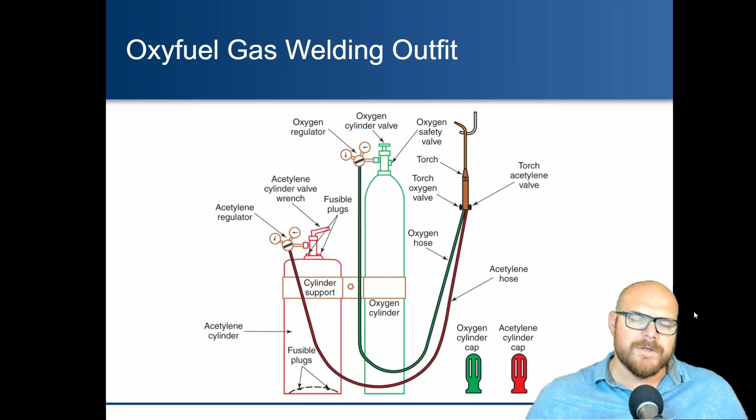Cutting attachments and cutting are going to be basically the same systems. We're going to talk about that a little bit later, but we just put a cutting attachment on. There's a lot of similarities with that, and cutting is still very widely used, whether it's using oxy-fuel or plasma, which we're also going to get into a little bit later on.

The oxygen valves, we've kind of talked about this in class, but one of the important things with these is that the valves are going to be either in the fully closed position or the fully open position. They're designed to withstand high pressures, up to about 2,400 psi, somewhere in that range, so it's a lot of pressure.

The tanks are made from steel, typically a quarter-inch steel, so they're pretty strong and durable and can handle that. But the valves, when they seal, they either seal at the base or seal at the top, which is why it's very important to open the oxygen valves all the way so we don't lose oxygen if we only just crack it. Because of the high pressure, it can actually leak by. So they seal at the top, they seal at the bottom.

On the oxygen tanks, we also typically have some sort of pressure device or safety system. If the pressure increases within that tank, this little valve will open up and let some of the gas out. Sometimes if things are being stored outside, if tanks are in the sun and exposed, it heats up the gases and the pressure is going to increase. Much like your tires increase as you start driving, the pressures will typically increase as it heats up. The same thing's going to happen in these tanks.

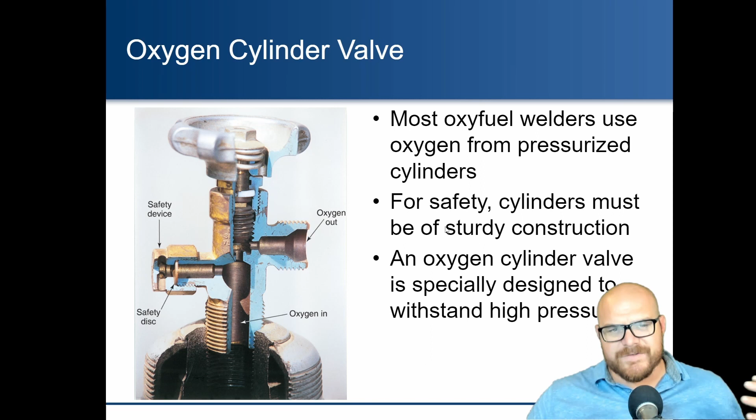So if they happen to go over the regulator pressure right here, it's going to just pop that valve open. Sometimes you may hear them opening. It's just releasing any excess pressure to make sure that the tank doesn't explode. Otherwise, they're pretty strong, pretty durable, and they're going to hold a lot.

In our systems, when we're doing oxy-fuel, we actually have a manifold system. So we have tanks that are at the end, and then it feeds lines into there. We call that a manifold system.

You are going to have a mainline regulator. This is true of both the oxygen and the acetylene. Then each station is going to have its own regulator for each one of those things. The master regulator controls that pressure, and we typically increase it a little bit more so we can feed the 12 different units that we have.

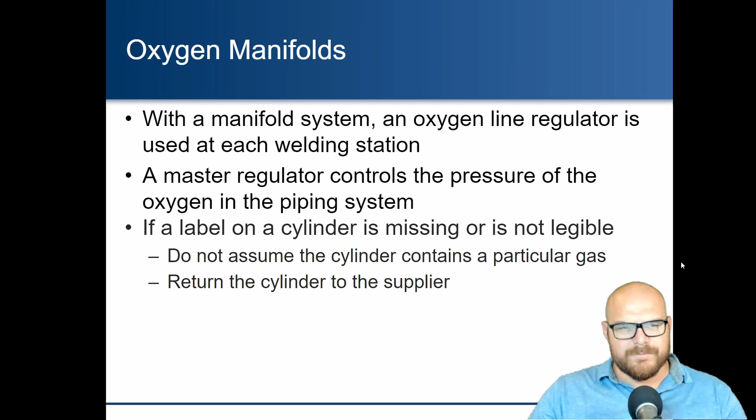Each of the tanks should be labeled with what is actually contained inside. If it's oxygen, it should be labeled oxygen. If it's acetylene, it should be labeled acetylene. If you ever have a tank without a label, do not use it. Don't assume what gas is inside, because you could be mixing and matching different things and it could cause a lot of issues. So the tank should be labeled. If they're not, return them to the supplier so you can get them replaced.

Acetylene is a gas that is very, very highly flammable. It will actually explode under 30 psi, or 30 pounds per square inch, which is not very much. So we have to be very cautious when we're working with these things.

Acetylene actually has acetone inside the tank to help balance it out. These tanks are typically around 250 psi when fully filled, and that acetone on the inside helps encapsulate the acetylene to make sure it doesn't actually hit that 30 psi. So it's one way that allows us to maintain that pressure.

One thing we have to be concerned with is how much we are drawing from that acetylene tank. We don't want to completely empty that tank very quickly, because the tank pressure and the acetone inside can get unbalanced and the tank could potentially explode.

They say that 1/7 of the cylinder's capacity should not be exceeded per hour. We don't have to worry about this in class because we'll put a new tank on there and may not replace it for the rest of the semester. We're not using that much acetylene, we're not drawing those things off, so we are very far away from this limit. But if you were in a high capacity, high use area, those are things you'd want to be concerned with.

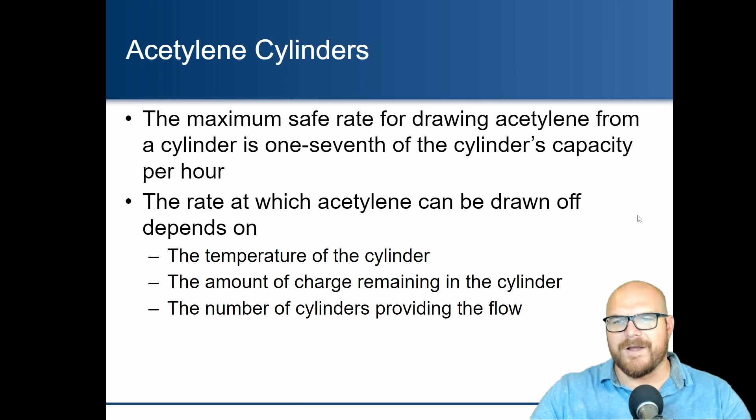Some of that depends on the temperature of the cylinder, how much is remaining in the cylinder, and how many different cylinders are providing the flow. We just use one for our systems, but some systems link a bunch together, which can help lower how much we're drawing off from each individual tank. If the tank is very low, it's obviously going to be more than 1/7, but it's the total capacity of the cylinder that matters, not what's actually left in the tank.

Fuel gases, whether we're using acetylene, which is the most common one, need to have a special system in place to make sure those things don't have a fire or anything coming back into them.

A lot of times, especially in a manifold system, the acetylene will go into a little water tank. We call that a water seal flashback arrestor. The gas goes down from the tank, and there's a pipe above the water level that enters into the manifold system. What this does is if there's a fire that gets into that piping system, it goes down into the water seal, the flame stays on top, and it will not allow it to go down into the water and back up into the tank. So there are systems in place to do that.

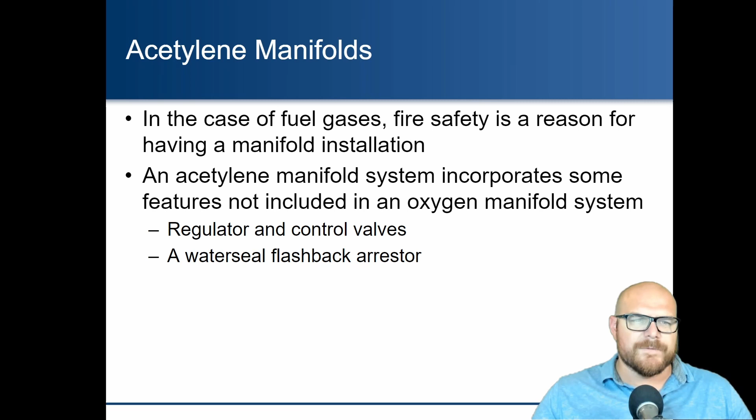We have regulators, control valves, we have flashback arrestors, they're all over the place. I'll show you some examples of what those things look like later on.

One thing that's really important is that acetylene should never go above 15 psi. There are red lines on the regulators indicating that you should never place it above there. In both our systems, whether cutting or welding, the pressure we're going to set those things at is 5 psi on the acetylene.

In our manifold system, we typically will set it to about 12 or 13, which is still under that 15 psi, but that's to allow the 12 different stations to be fed with the 5 psi that you need to run each of those things. If we just ran the main regulator at 5 psi, if everybody was running each one of those stations, you would not have that 5 psi at each of the stations. So we have to increase it a little bit.

It is pretty explosive. Acetylene can explode, like I said, under 30 psi. So we cut that in half and we set it to a maximum of 15. But when we're actually welding and cutting, we set it to 5 psi.

We have smelt that stuff in class. If you haven't smelt that, I will make sure that you do smell that stuff. Acetylene has a very distinct smell. They do that so that way if you smell that, you know exactly what that is, and we need to look at that and find out what's leaking or what was left on, and get that shut off or get it fixed if we need to.

If you have too much acetylene, breathing in a little bit of it is not a problem, but if you have a lot of acetylene, it can actually displace air in a poorly ventilated area. So if you're inside of a tank or inside of a closed area, you want to be very careful about that acetylene because it's lighter than air and it can displace that and then cause you to suffocate.

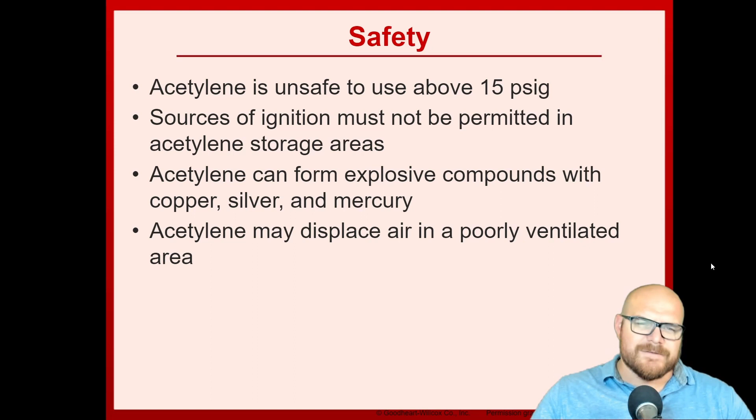We're not going to be welding in anything that is not well ventilated. We're not welding inside of anything or cutting or doing any of that stuff. So the chance or likelihood of that happening to us is very slim. But if you're ever in an area that is confined, you need to be careful about that.

To adjust that pressure and to increase it to the desired amount, you have the adjusting screw that's going to be in the center. You turn it clockwise. I guess I go clockwise like this - I'm backwards. You go clockwise to actually increase the pressure, and then counterclockwise to back it off.

When we are done welding, you turn it counterclockwise a couple turns to back that off and get that gauge back down to 0. We don't want to leave any oxygen or acetylene in these lines when we are done welding. Those things can cause issues - oxygen can cause a flame to get bigger, and acetylene is a flammable object. We want to completely remove that and store those only in the tanks when we are done.

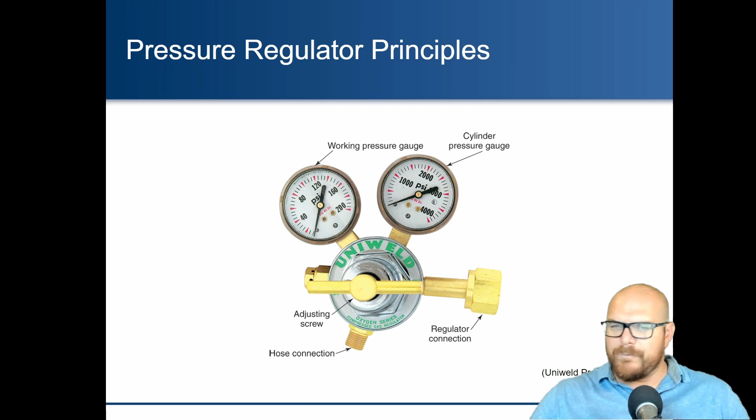Some things we talked about in class, but we're going to reference it again. The different hoses are going to be colored. Oxygen hoses are going to be colored green. They might also often be marked with OXY, indicating that they are going to be used for oxygen. They are going to be traditional right-handed threads. To help make sure that we don't mix these things up and we don't mix regulators up, on acetylene regulators or fuel regulators, we're going to be using left-handed threads. So they're actually going to go opposite.

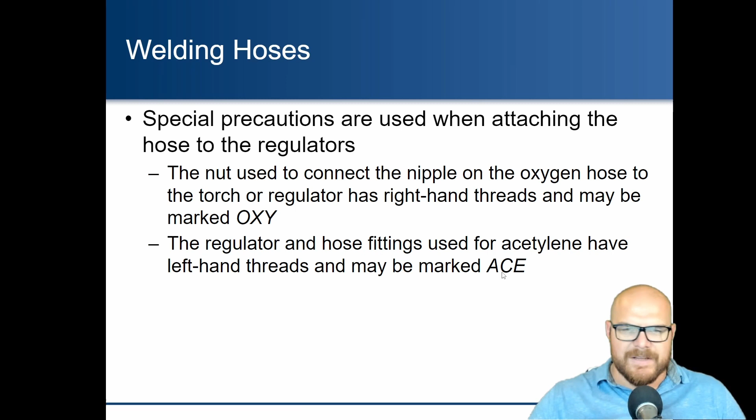This eliminates the possibility of us connecting an acetylene hose onto an oxygen regulator, or vice versa. Typically these fittings are marked with ACE, and they'll also sometimes have notches in the threads or fittings to indicate left-handed threads, so we know not to mix those things up.

The hoses we have to be careful with, especially the ones coming off each individual torch. If they come in contact with a flame or hot metal, they can melt and expose that gas into the environment. We want to make sure they're not kinked, as that can reduce flow. It can also weaken the hoses and cause them to break down prematurely.

During welding, hoses should be protected from falling objects, vehicles, and foot traffic. We don't want to step on them or roll over them. We don't want to do that kind of stuff. We've got to be careful.

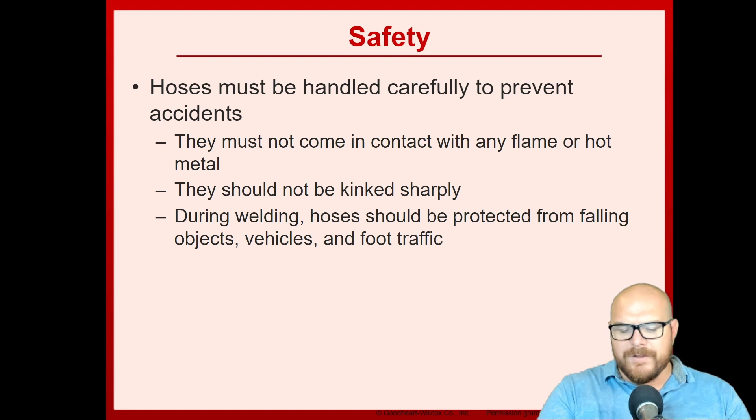At the welding stations, there are tubes that the hoses run down on top of the table, which helps protect them, and then they run underneath the table. The table also provides some protection, so the hoses are in pretty good condition and not exposed to a lot of those hazards. When we're cutting with the oxygen tanks, those things are a little more exposed, so we have to be careful when using them.

The torch bodies we're going to use are typically positive pressure torches. There are a couple different parts: you have the torch tip, this is the welding tip, and a little nut that you hand thread onto the top. This is where the mixing chamber happens, where the oxygen and acetylene mix. Inside the body is where the lines run through, and we have two different valves on this system to turn on our gases.

Our acetylene is always going to be on our left-hand side, and the oxygen is always going to be on the right. You can look at the color of the hoses to help indicate which valve is which gas on those systems.

In a positive pressure torch, the oxygen and fuel are mixed in the torch and burned at the torch tip, that's where we see the flames come out. The hand valves are used to adjust our gases up or down, giving us a little more acetylene or more oxygen.

What we're looking for is trying to reach that neutral flame. We don't want an oxidizing flame, which has too much oxygen. We don't want a carburizing flame, which has too much acetylene. If you haven't seen it in class, I'll show you how we actually set that flame. That is one of the most important parts of oxy-fuel welding.

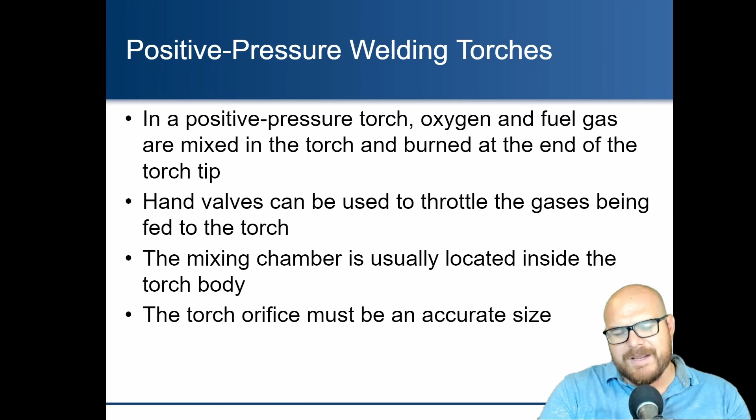The torch orifice must be of an accurate size. We have different sizes that we use in this class: a double aught, which is 2 zeros, an aught, which is 1-0, and a number 1 torch. As the numbers increase, the sizes of those torches get larger. So for thicker material, or to get a hotter weld, you up the size of that nozzle.

The welding tips we use on these things will vary. We do sometimes have to clean them out, as some are a little worn out and not new tips. So we have to make sure we're matching those things, and we might have to clean them out. If we get a flame that's split in two directions, we may have to do that.

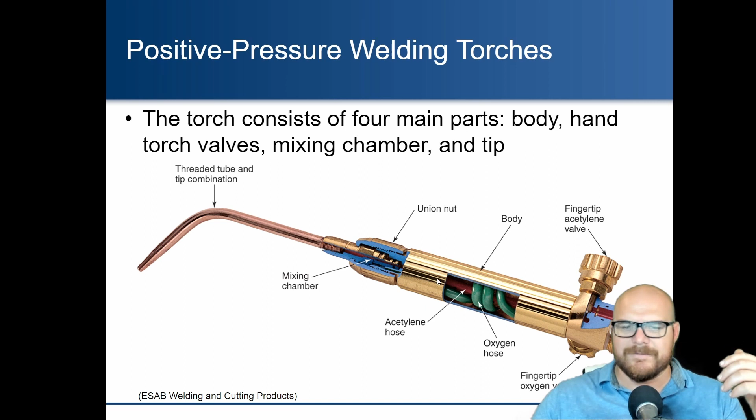There are lots of different torch tips. If you're having issues with them, you can swap them out with another one, or try to clean the tips out of any debris. Some tips are a two-piece system where you have your torch body and can change the tip there. The ones we have are just one assembly, so you unscrew this from the torch body, and then hand screw or hand tighten a different torch on. So if we want to swap the tips out, we simply pull this whole assembly off and swap it with that.

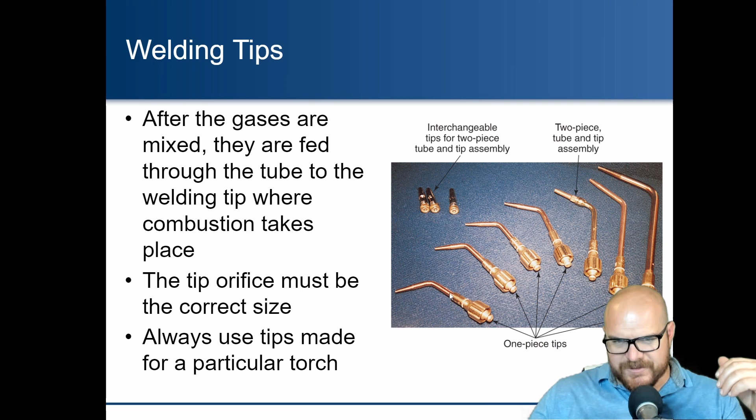The labels should be numbers just on the back side of that copper, which will indicate the tip size that we're going to be using.

Tip cleaners are used to help make sure that we clean it out. If we get debris, stuff can pop back up into that torch and cause it to clog up, which can cause the flame to become split. It's not going to weld good for you, you're going to have issues with it. A good torch tip helps make sure you actually are welding and get a good weld out of that.

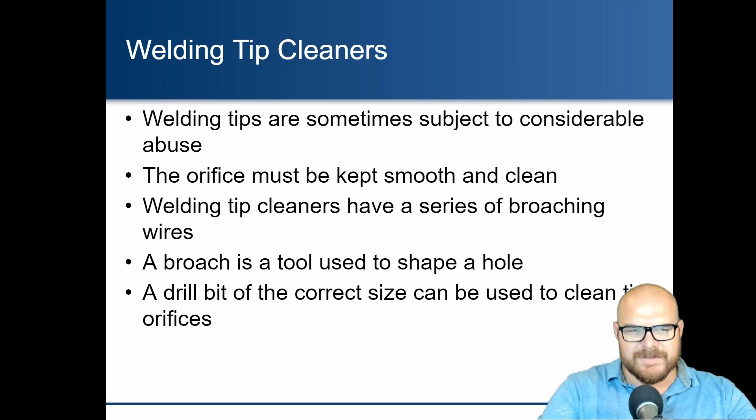Tip cleaners are essentially little round files that go in. You find the file that just barely goes through. You don't want to file that out, you just want to be able to clean those things out. So there are lots of different sizes on the tip cleaners that we're going to use.

As far as what we need to wear, the welding helmets we have are suitable if used in grind mode. You do not need to have them darkened up to a shade 10. Shade 3 to 5 is typically what we want to wear, and shade 3 is what our welding helmets go to when set to grind.

There are also safety glasses that are tinted. They either have a green or a brown, with varying shades that those things can get in. You can purchase a pair if you want instead of wearing the helmet, but the helmets will suffice. The glasses are nice, you don't have to have separate safety glasses since they're built into that, and it's a little bit easier.

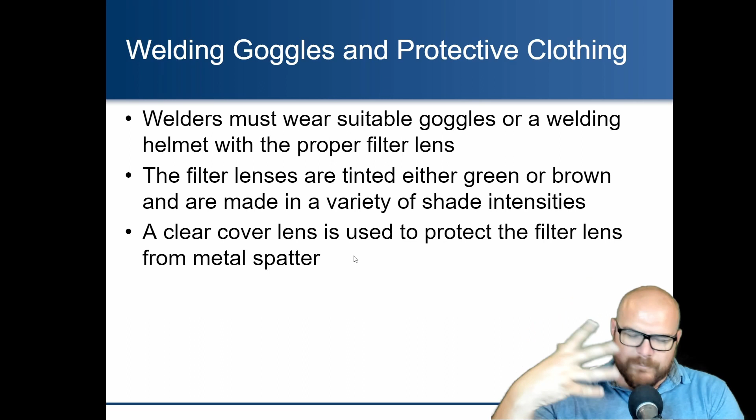You don't have to worry about having your face covered because we don't have the probability of getting sunburnt or getting arc flash like we do with other processes. We need to protect our eyes, but our face can actually be exposed. If you're concerned, wear the welding helmet, and that's going to cover your face from anything that might come back up at you.

If you are welding with a hood like this or a helmet, you still need to make sure that you maintain safety glasses underneath. These glasses look like they're a little bit shaded there, more like a sunglass. Those aren't going to be a shade that you're going to use for oxy-fuel welding. So if you're using the helmet, make sure you keep safety glasses underneath.

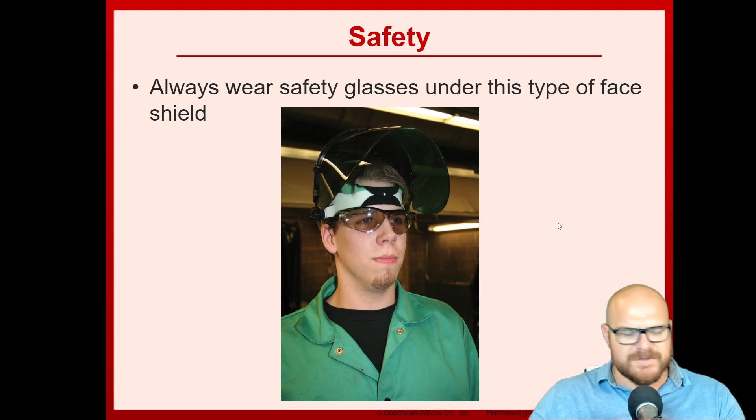If you have the oxy-fuel shaded lenses, those are literally just safety glasses that are shaded to the correct shade number, and they're going to provide that protection for you. We have a couple pairs around in the shop, but again, if you want to get your own, you can. They're not the cheapest safety glasses to get, but they are a little bit nicer to wear.

We should have gloves to help make sure that we protect our hands. We are still dealing with heat. Sometimes we will use thinner gloves to get a little bit more dexterity in our fingertips, but the big shielded metal arc welding gloves will still work fine as well.

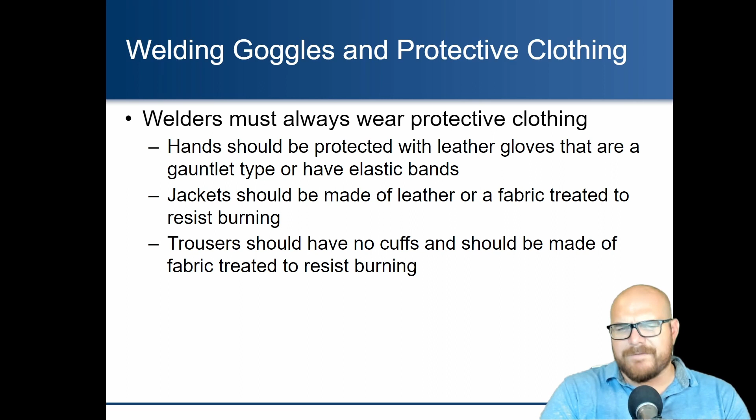We should try to cover our arms, even though we're not worried about that sunburn. We could have metal coming back at us, we could spark metal, it could pop back at us, and so we want to make sure we wear that. So a lot of the same stuff that we have for shielded metal arc welding should still exist with oxy-fuel welding.

When we're lighting the torch, we have strikers that we're going to use which has a flint, and that flint is going to create a spark. That spark is going to help light that torch up. We never want to use a lighter when lighting these things, because if the flame burns or melts that lighter, you could have butane all over the place and it could explode.

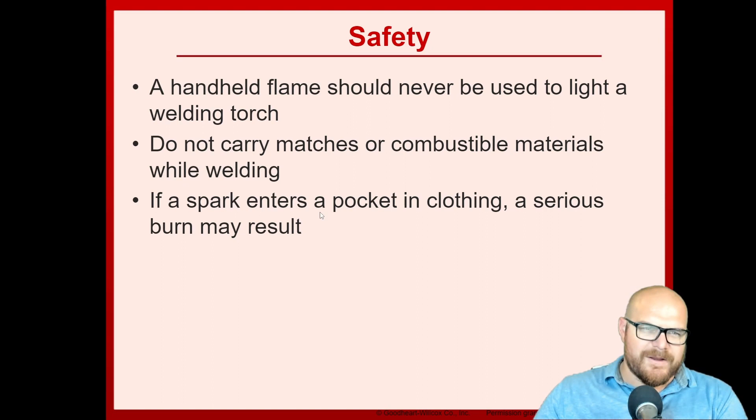Don't carry matches, flammable, or combustible materials while welding, because that stuff can cause an issue. Make sure your clothing is also in good condition as well.

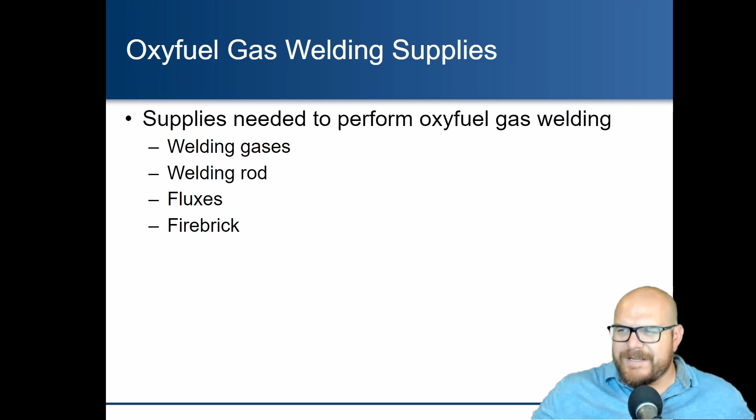The stuff that we need for oxy-fuel welding includes welding gases. We need a welding rod that's going to be separate, which you're going to feed in. Sometimes we need to have fluxes with certain welds, you're going to see some of that when we do brazing. And then we also need some fire brick to help maintain that heat within that weld.

Acetylene is the most common gas that we use for oxy-fuel welding, but you do sometimes see hydrogen, propane, butane, and also natural gases within those systems as well.

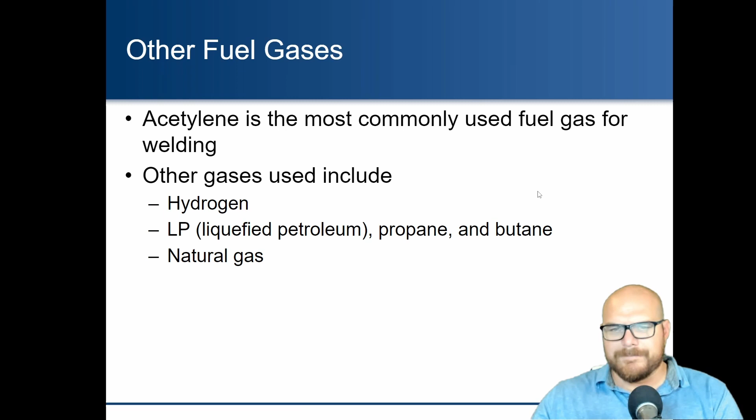Propane is probably the next most common gas you see, but acetylene is the cheapest and easiest to get, and that's why you see it most often. If we're doing cutting operations, propane typically gets a good, much cleaner cut, so you'll see a lot of people use that. But the cost goes up significantly from acetylene, so that's why a lot of people stick with acetylene.

We talked about check valves, and in these systems there's a bunch of check valves in line, each one for acetylene or for oxygen. These things essentially prevent the flow of gas in the reverse direction, allowing flow in only one direction. Check valves make sure that if gases try to flow in reverse, they stop, and any flame that might be present isn't allowed through.

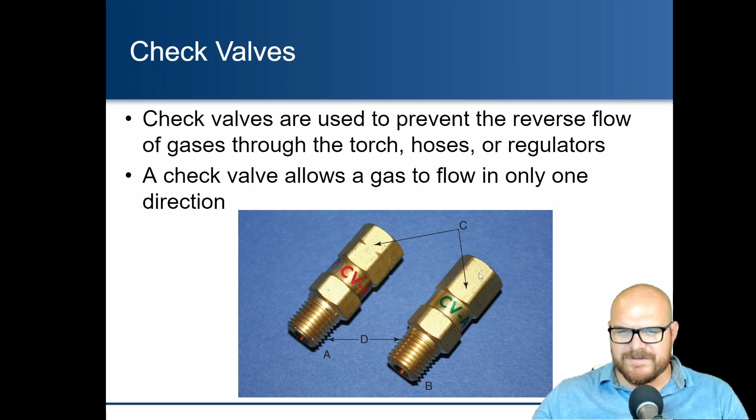When we talked about the reverse threads or left-handed threads on the acetylene, you can see the notches I was talking about in this example. On the oxygen side, there are no notches; these are standard right-handed threads to tighten those fittings.

The way a check valve works is very important, and I'm going to ask this on the midterm. Check valves are a valve, but not one we turn on or off - they work automatically. We don't turn them off, we don't open them up. They're either working if the pressure is going in one direction, or they shut off if it's going the other direction.

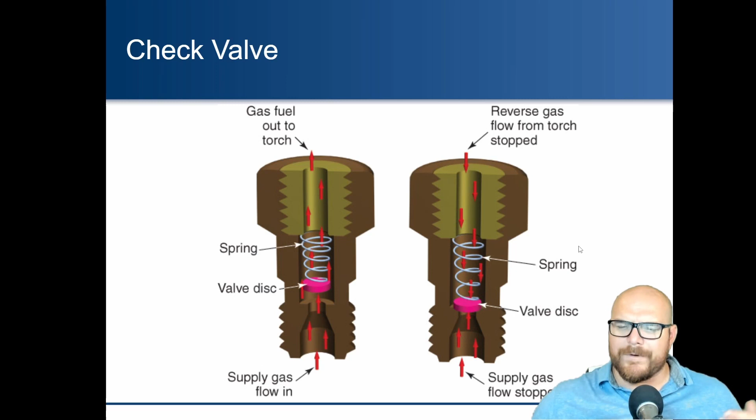So these check valves are really important to help stop any gases or flames from getting into a system.

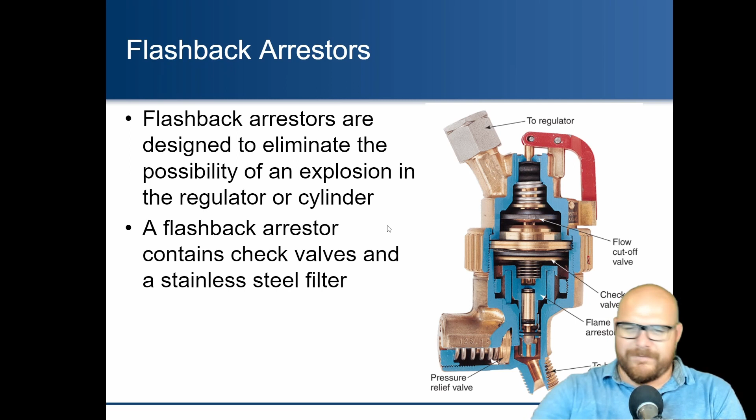Flashback arresters are things we have as well, and these are in multiple places on our equipment. They're kind of like a check valve, but they actually sense if a flame is traveling back up into the system, and will then shut that off and prevent the flow of gas or flames from traveling further back. We have many of these within our systems to help prevent a flame from potentially going all the way back into the tank if that happens.

On this torch body, we could put a cutting torch, a welding tip, or anything on the tip here. These things actually have flashback arresters built into both sides, which helps prevent the reverse flow if something happens. A lot of our systems have these. So if we happen to have a flame that comes back into there and travels up into here, that flashback arrester should stop it right there.

The biggest thing - if we ever have a flashback, you'll know it because you'll hear a loud pop, that's the backfire, and then you'll hear a very high-pitched whistle. That whistle is the flame traveling back into the torch body and sucking in air to get the oxygen that flame needs. So if we hear that high-pitched whistle, the best thing to do is shut off our acetylene. That stuff will burn out, any acetylene in the torch body will burn, the flame will go out, and you can restart your torch. It's not going to cause any issues or problems.

If it happens to get passed into the hose, you may burn the hose up. But I've never seen that happen, and we have flashbacks happen all the time.

Okay, so that happens, it's very common. The best thing to do is shut off your acetylene, give it a couple seconds, and it'll burn out. You can relight your torch and continue welding.

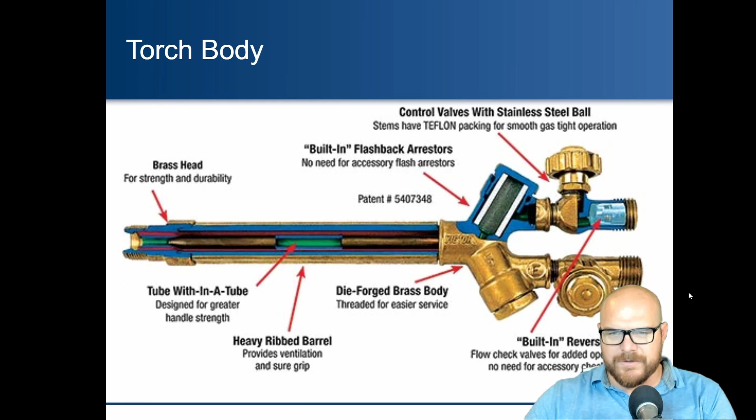The welding rod is our filler metal. In some cases we won't use filler metal, but for most other welds on oxy-fuel you'll be using a welding rod. We'll simply be using mild steel, but you can do cast iron or stainless steel too. We'll do a little bit of braze welding, which is for welding alloys of different materials together. So we can combine mild steel with aluminum, mild steel with stainless, mild steel with cast iron, or stainless with aluminum.

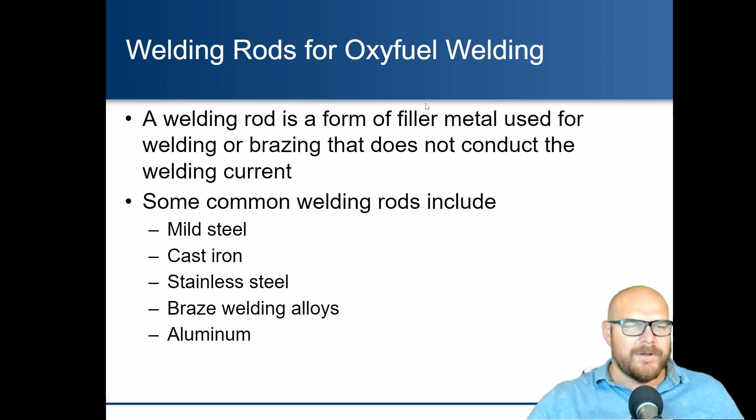When we're braze welding, we're not actually melting the metal. We're simply heating it up and gluing it by getting that braze material to weld into the pores. We can do oxy-fuel with aluminum, although stainless steel and aluminum is really done predominantly now with TIG welding. Most of the time when we talk about oxy-fuel, we're working with mild steel - it's easy and it's cheap.

The welding rods are similar to the ones we see with shielded metal arc welding, though the designations are a bit different. We have 3 different systems we typically use: RG45, RG60, and RG65. These relate to tensile strength - a 45 is 45,000 pounds, a 60 is 60,000 pounds, and a 65 is 65,000 pounds of tensile strength.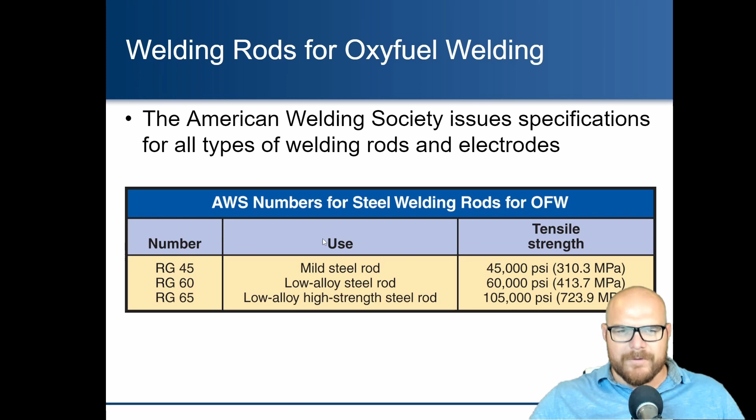So they're not quite the same as what we see with shielded metal arc welding systems, which aren't as laid out and systematic. Typically in this class, for a mild steel rod we just use an RG45. It's not going to be as strong as the shielded metal arc welding rods we've been using, but on thinner metal, strength isn't as big of an issue.

Sometimes we do use a flux. A flux is a material that helps dissolve and melt, and prevent oxides from getting in there. If we're doing mild steel, we're not using fluxes - we use fluxes with silver alloys and copper alloys. If we're doing brazing, we're going to have a flux on there, and that flux will differentiate between the type of material we're welding on and the application we have.

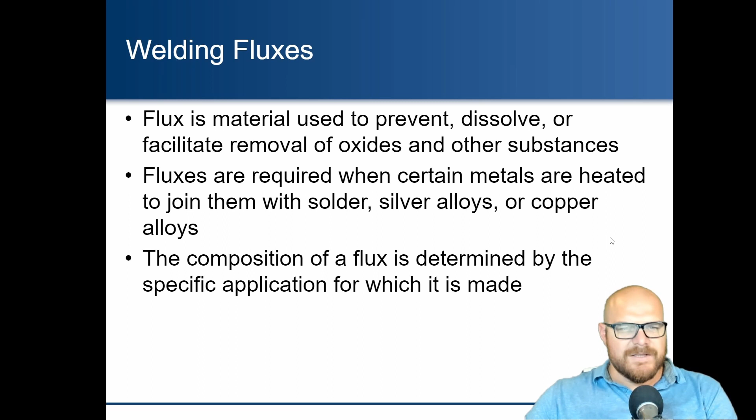The rods we use for braze welding will have a flux on the outside of the rod, much like your shielded metal arc welding rods do as well. So you don't have to worry about adding that in, but you have to use a rod that does have a flux to help prevent those oxides from getting in.

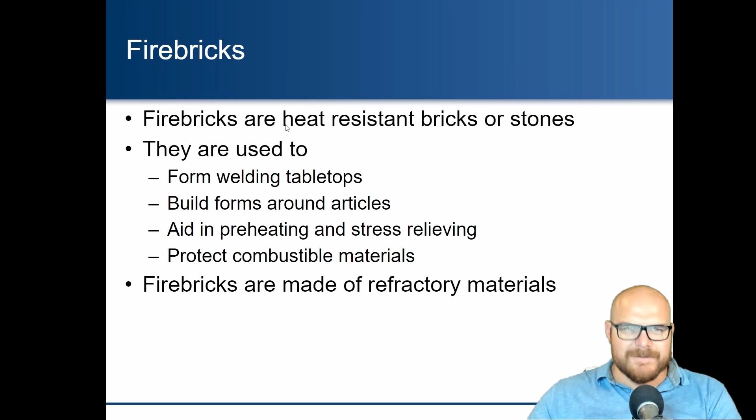Very often we use fire bricks. These are heat-resistant bricks using refractory metals or materials to help retain heat. These are not regular standard red bricks that you'd buy from Home Depot or Lowe's - these are bricks designed for fireplaces, barbecues, and oxy-fuel welding. The bricks won't pop, but they'll help maintain heat within a system, and they won't combust or catch fire. So using fire bricks is very important, not just standard red bricks.